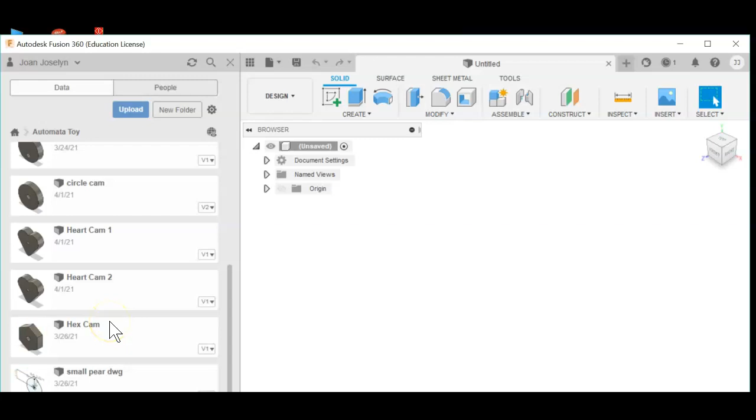Today we're going to look at the Automata box. This will be the simple box using the shell method, super simple. Let's go into Fusion 360, open up the data panel, and proceed to our project, the Automata toy. Double click to see all the parts you've made so far. You should have a lot of cams in there by now. We're going to make this simple box right here. Take you just a few minutes.

Okay, so I'm in my project. I'm going to close this up, double checking that I have the y-axis up and that I'm in inches. I want to make sure of that too. Okay, so let's create a sketch.

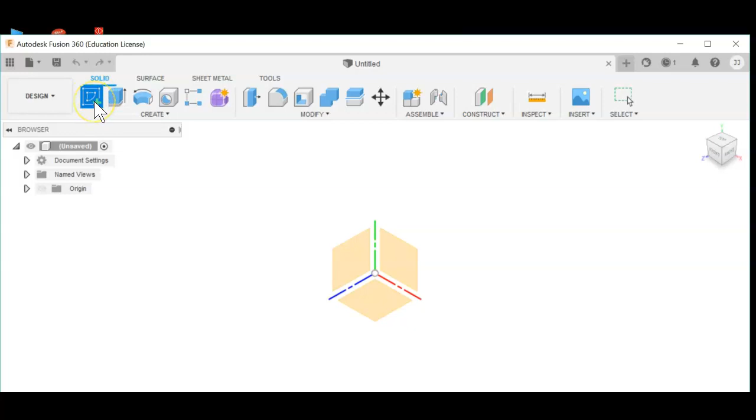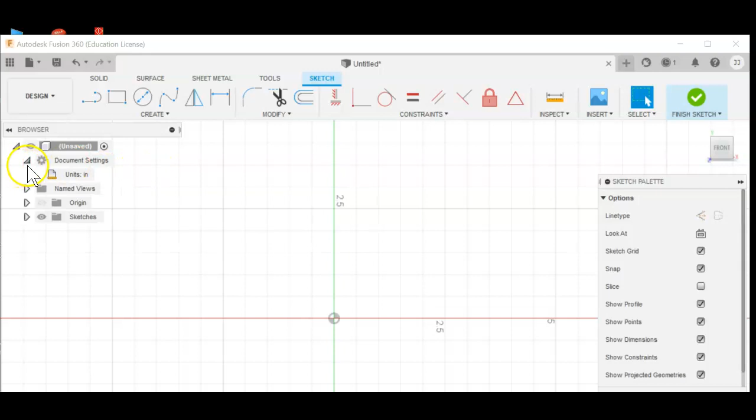We're going to click up here, create sketch, and I think we'll make this on the front plane. Yeah, that'll work best. So I'm in my browser. Let's double check my document settings by clicking this caret right here, this triangle. It says units inches. If it doesn't, go ahead and change that, get into inches, and then at some point change your preferences right here, you click into it, change it to inches, and then go start a new part.

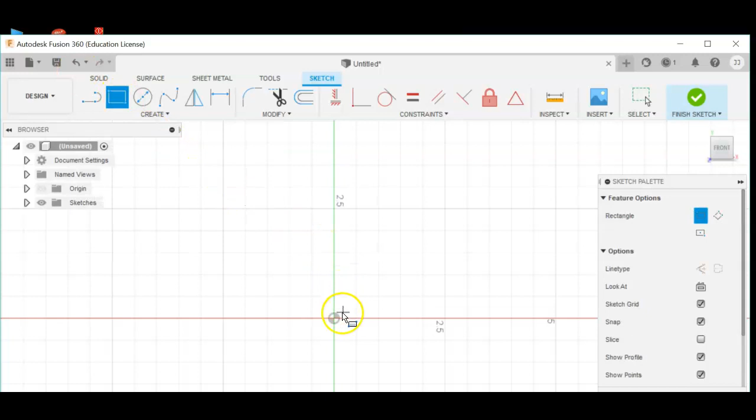Alright, so we're on the front plane. We're going to use the 2-point rectangle. I like to call it the square tool, but it's the rectangle tool. So click there, click on the origin, drag to the right, and before you click - I have not left clicked yet - see where it's blue highlighted, you can type your dimensions in there while it's highlighted.

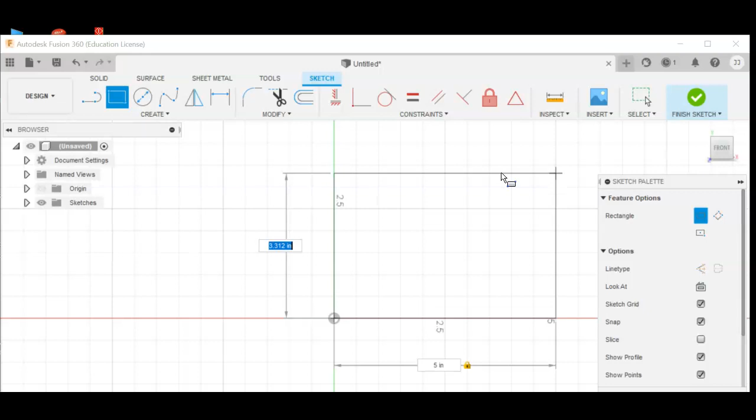So I'm going to type in 5. I don't have to type inches. It knows my document's in inches, so I can just type the number and I'm okay. I'm going to hit tab on my keyboard, and type 5 again. So a perfect square, 5 by 5, enter. I'm on a small screen, so I'll zoom out a little bit. And then I'll escape on my keyboard twice. So 5 by 5, not a problem, looking good.

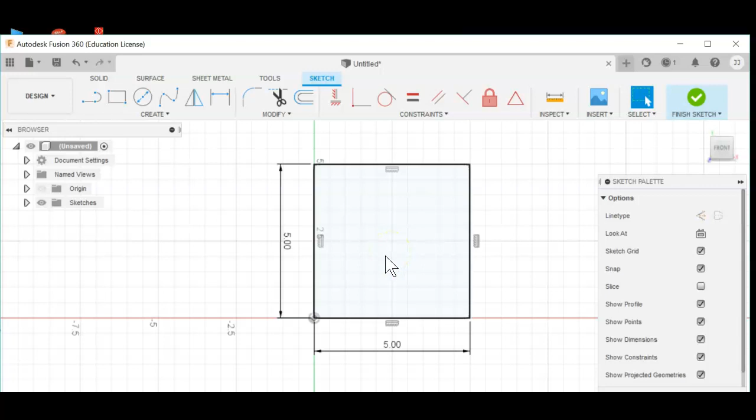And then we're going to take it back about 4 inches. So let's just come up here and finish our sketch, go to the extrude feature. Your ribbon changes once you finish your sketch. Now I'm in the Create panel, and I'm going to use the Extrude feature. I'm going to rotate this a little bit so I can watch it extrude by hitting the Home key, and that takes me into isometric view.

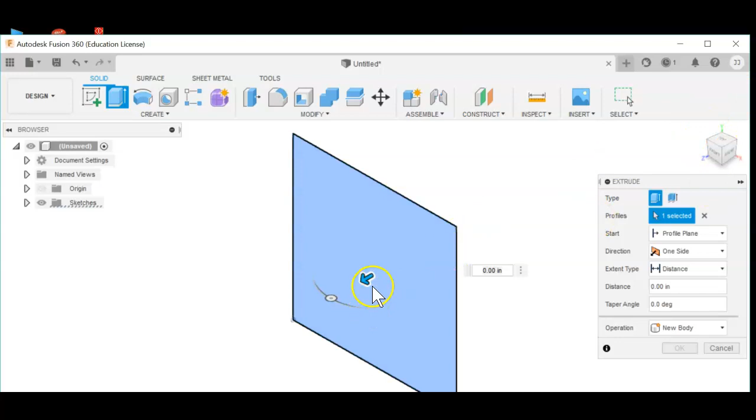The Home button takes you into isometric view. You can drag this out, or you can type in 4 - 4 inches would be the proper depth there. And the next thing we're going to do, use the Pan feature, drag it up a little bit. I'm going to try out the shell. Hit escape on my keyboard after I use the pan feature.

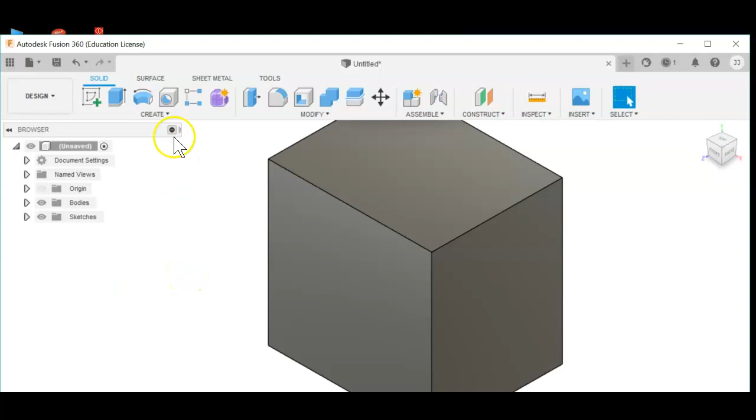If you come up here to the modify panel, so we left create, we're going to modify, we're going to use the shell. Great little feature, easy to use. Click on it, click on the front face in this case, right here. And it gives you an arrow, so you can drag which direction you want. Basically, it's going into the object to make it hollow. I want to make this right here inside thickness, or this, it's the same thing. This is the dialog box, this is the marking menu.

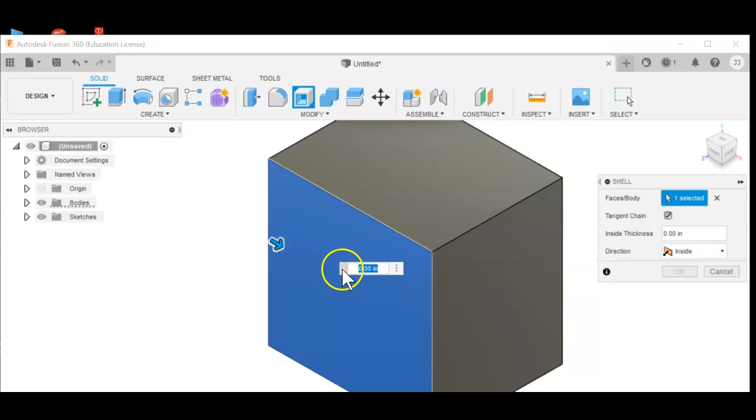I'm going to type 0.25 because that is the width of the wood I have in the classroom for the laser cutter. So 0.25 gives this space right here. I'm going to hit enter. And I mean, there you have it. There's your box. That was just 3 steps: a sketch, an extrude, a shell. Fun deal. Nice and easy.

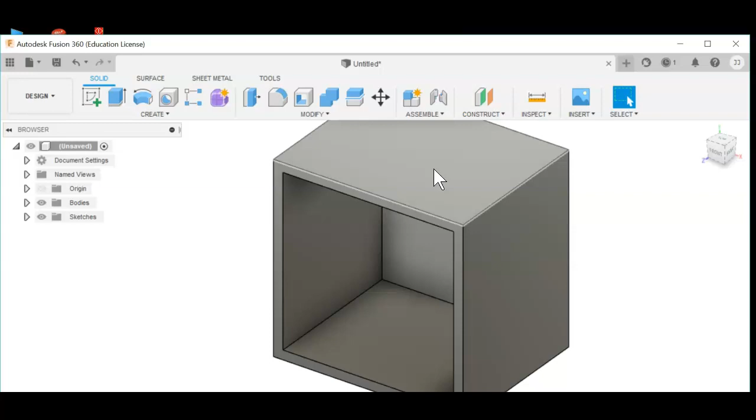In the next video, we'll make this with individual pieces so that you can alter them and change colors and whatnot. Alright, we need to add some holes on the side in order to put in the cams, and then some holes on the top to put in the followers. It'll vary depending on what you make in the classroom, but for the online one, we can make it all the same. So we need a new sketch.

I'm going to hit Create Sketch top left. I'm going to hit the side of this box - this is the right side. It gives me a little grid. Just click on that, get it in front of you. Now we want to put a circle straight in the center. There's a couple of ways to do this. You can drop a line across either end and make an X and see where they meet.

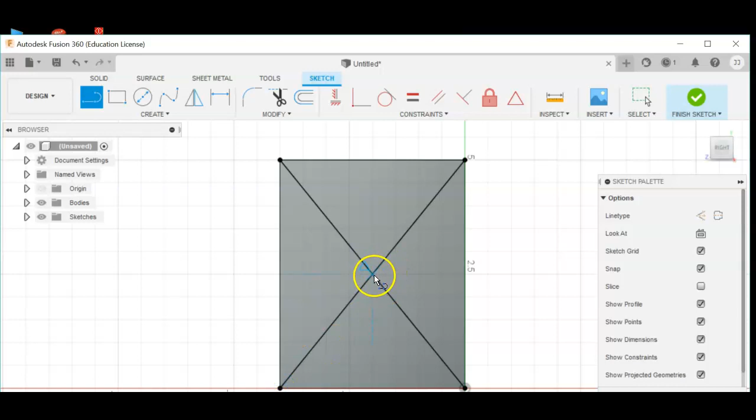You can do that like that, and then just drop your circle right there. Use the circle tool and put it right there. Actually, I'm going to undo that, because I can see where my center is since I have the grid on.

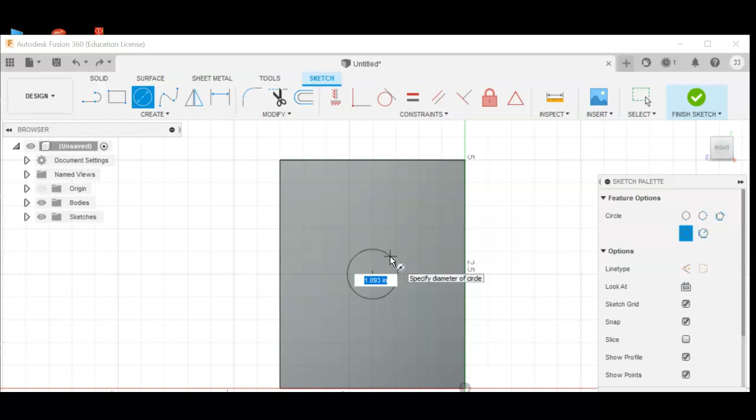So just drop that right there, drag it out, and the wood for the axle is 1/4 inch. So I need to make this a little bit bigger, and I'm going to make it 0.26. Give myself a little space there.

Now we need it to go all the way through so we can put in the axle, so we're just going to extrude it across so we don't have to make two holes. You can make two holes, go on the other side, make another hole. That's entirely up to you.

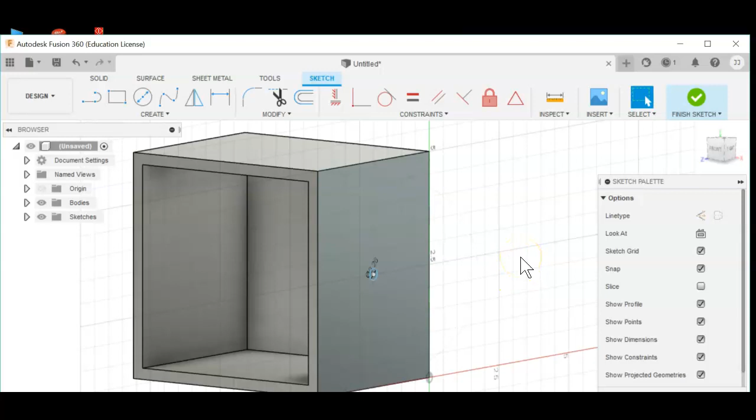Alright, so I'm going to finish my sketch, top right, and hit extrude. It doesn't always select it for you, you have to select it. And now I want to remove, so I want to come over here to the dialog box and select cut.

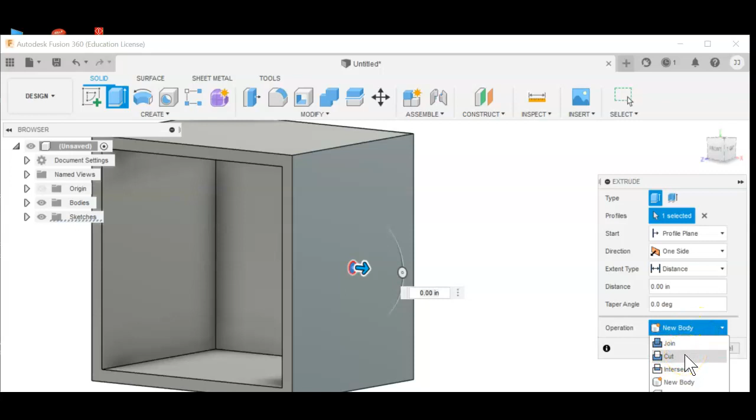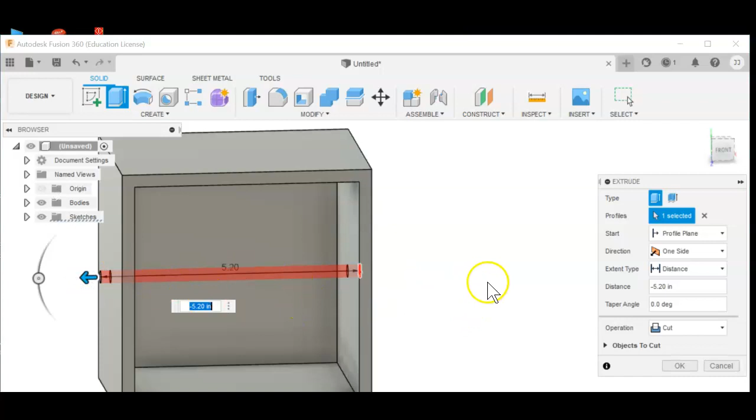It will also do that if you just drag your arrow the other way. It'll know you want to cut and it'll change for you, so you don't need to be precise here. You just need to go through your box. It's red not because of an error message, but because it is removing material. It's telling me, hey, you want to do this stuff? Yes. So click OK.

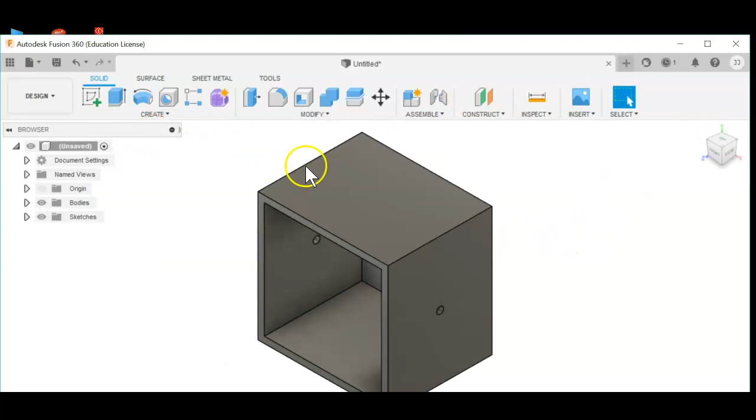Hit your orbital tool, and you should be able to see through it. Hit the home tool. Now, depending on your design for your cams, you'll need holes on the top. I'm going to keep this for now and just put up two. You can change yours later.

New sketch, hit the top. Get this in front of us a little bit. Use the grid feature here, it makes it easier. Oh, I like it when it's wider. Alright, and we'll do this. We can always move them later. Looks like I come over here.

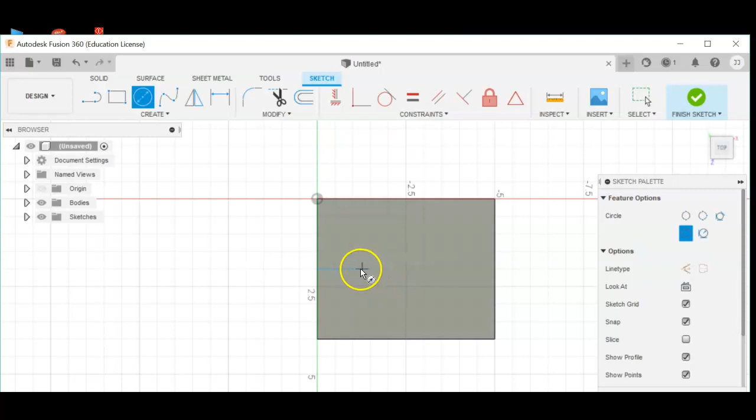This looks so much better than putting it on one of those grids, doesn't it? Put one here, we'll make it 1/4 inch. The line followers are much smaller. Let's do the same thing on the other side.

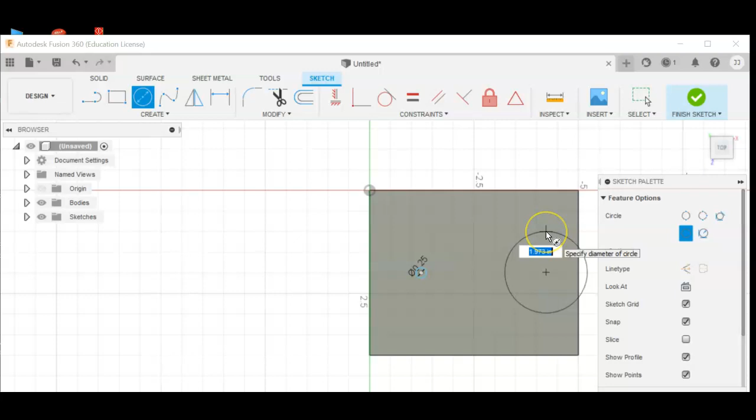Right in that center there, and 0.25. Okay, so when you're in your own project and you want to make it fit your own, you can dimension these. Use a dimension tool. Do one dimension from the side and one dimension from the top. So I got there to there. I don't like that number at all.

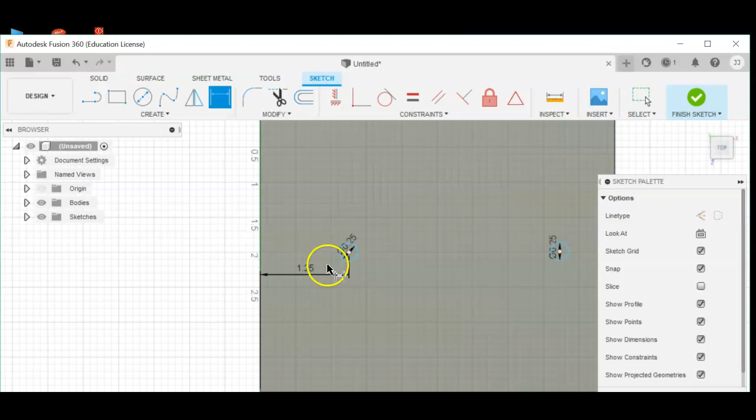1.25 looks good to me. And then move this over. Do the same thing on the other side. Oh yeah, this is way off. And 1.25. So don't rely on the grid for that one.

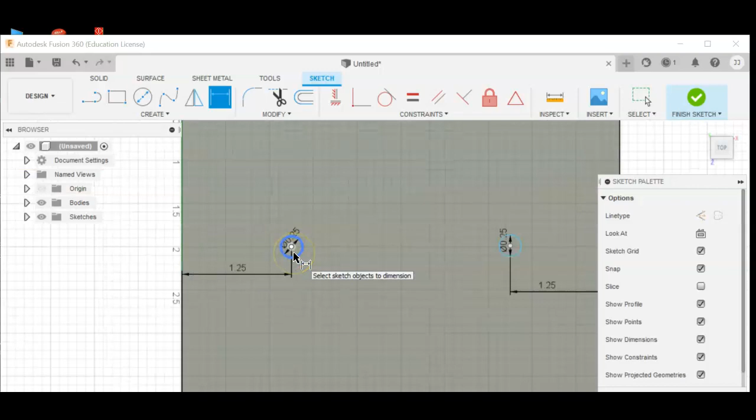Well, I can't. And then let's see where they are from the top. So I'm still in Dimension Tool. I'm going to click the center, always the center of the circle, the top of the box. Normally you don't dimension on the objects, you go off. You come out here, but you just want to make sure you can see it. That's 2. I like that.

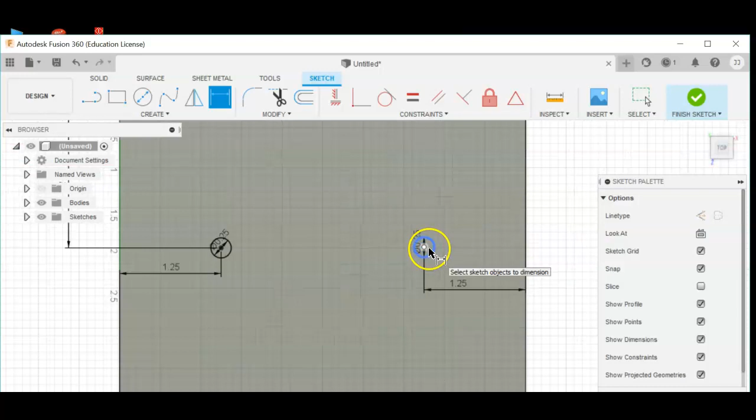That's fine because it's a 4-inch depth, remember we extruded it that far. Do it again on this side. Get right in that center, get in the top. I'm using the mouse wheel to scroll. And look at that, 1.99. That's not going to fly. 2. Okay, finish your sketch.

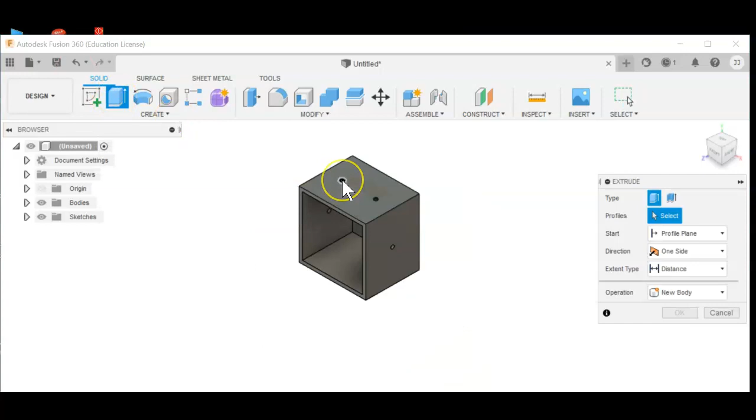Hit the home button to get an isometric view. Come up to the top, hit extrude. And you might have to zoom in to grab it. I'm going to get 1, 2. I don't know if I need to shift. It didn't look like I did.

I'm going to cut, and I'm just going to drag down. Yeah, I got both of them. Drag down, it really doesn't matter how much, it just needs to be more than 0.25 because that's how thick the wood is. So it looks like I got 0.5. It's not adding material, so as long as it cuts through, you're good.

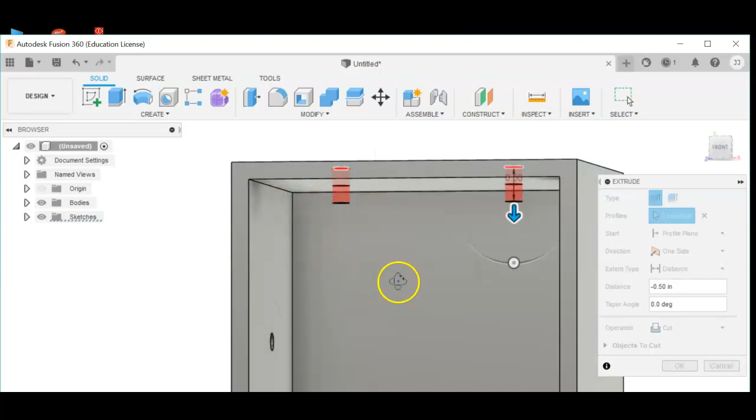Okay, hit the home button. And you are ready to place in your axle with the little handle and your followers and your guides on the top. And you can vary those any way you want by double-clicking them and changing them.